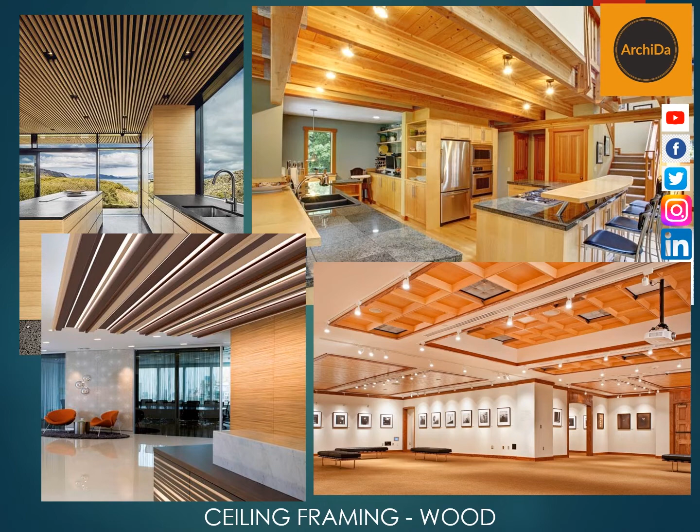For this video, we will be discussing the ceiling framing detail, or the basics of how to do ceiling framing using wood. So as you can see, you can always come up with different variations or iterations of how a ceiling should look, and not just a plain flat ceiling. So let's move on to learn the basics.

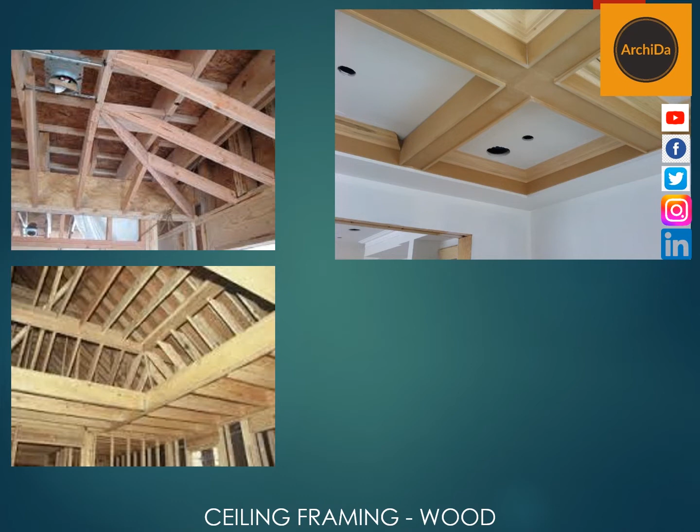For a ceiling that has framing that looks like this or like this, it's called a recessed ceiling. So this is how it may look, including your false beams. This is another variation. This is a 3-layer ceiling. And this is the arc ceiling, if you would like to call it that way.

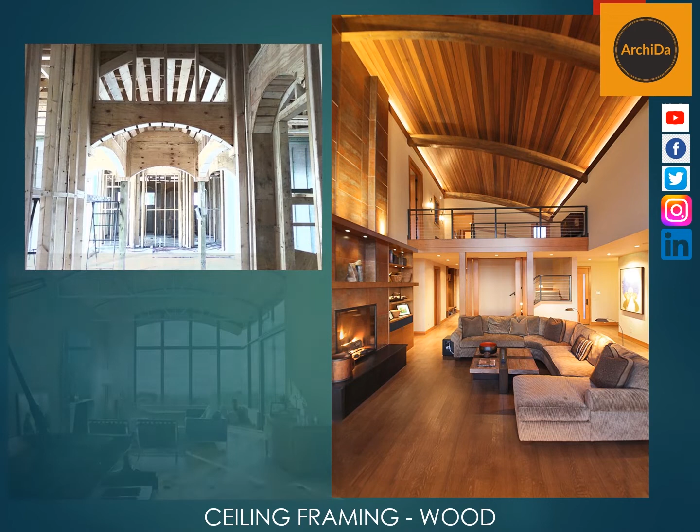Now for a semicircular ceiling that looks like that, it may come out like this, meaning to say, with this finish, you will just install slatted wood beside each other. This is also another variation of it.

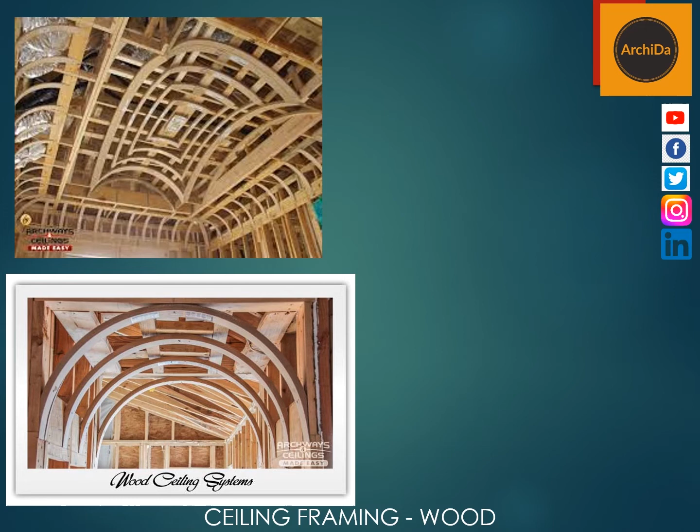Now in the event you would like to come up with a semicircular finish, remember the wood cannot bend into that radius, so you will have to break it down into several pieces to come up with that radius, after which you will install the actual finish. Or you can have it straight up like a straight dome-like structure.

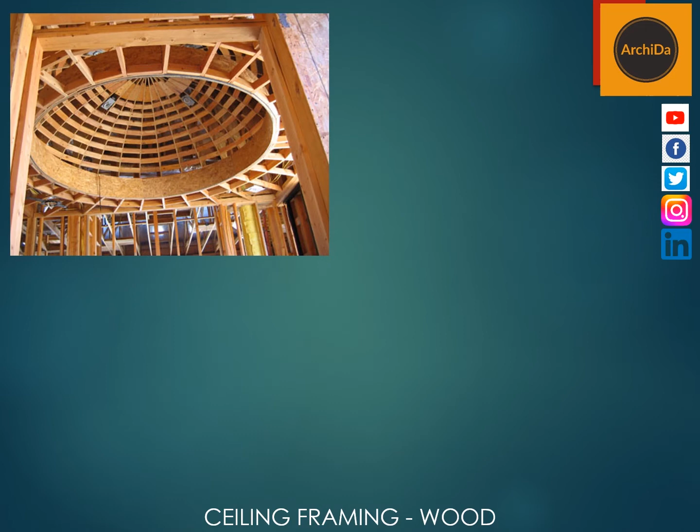Now in the event you would really like a full dome structure, that is also possible. As I said on my previous slide, you just have to subdivide it into certain sizes or segments wherein you can still bend the wood itself. So you can come up with a look like this.

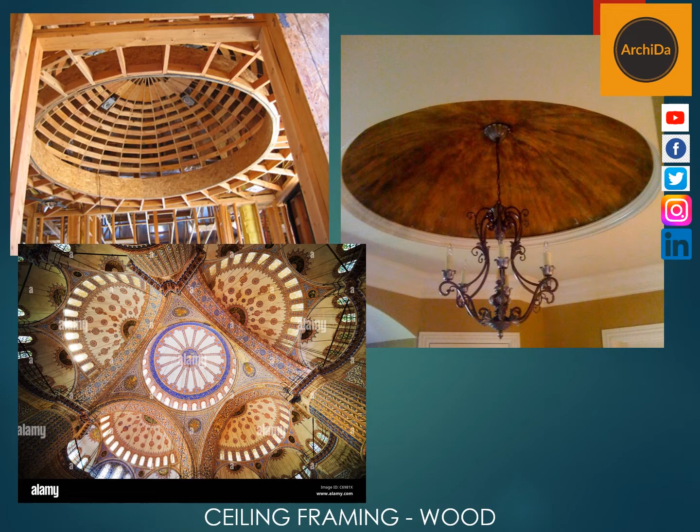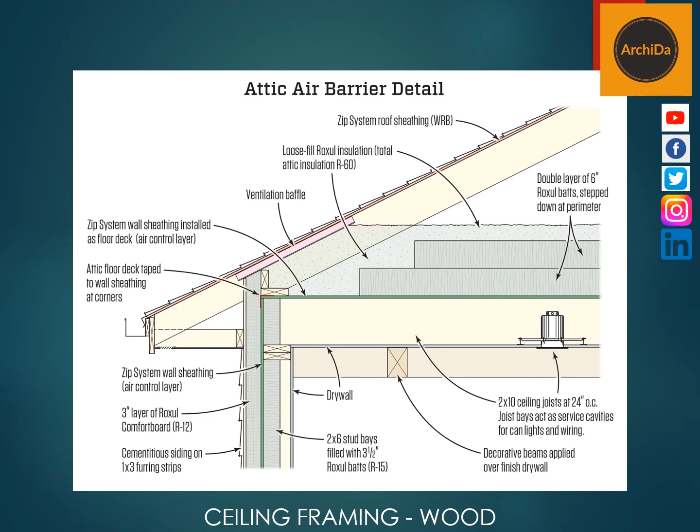Now if you were to study this ceiling detail, always try to remember to leave space above the ceiling finish for any type of lighting that you would like to install. For this detail alone, you may also want to add insulation and all those other things.

Now for the ceiling framing, it is just the same as the wall framing, wherein you will have to come up with a grid pattern and just lay it down. Then you will have to install your supports from that grid pattern up to the joist above, whether it's going to be a slab or a wooden joist.

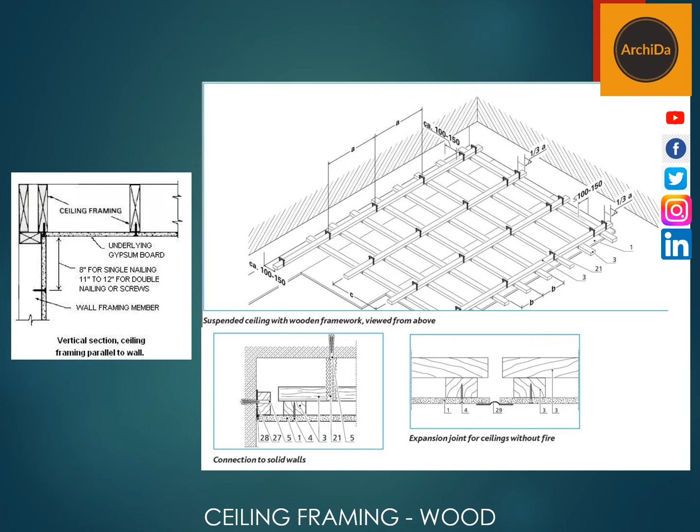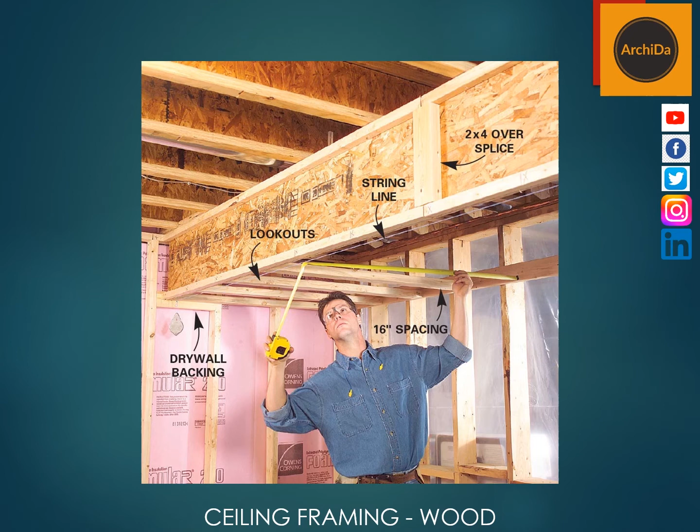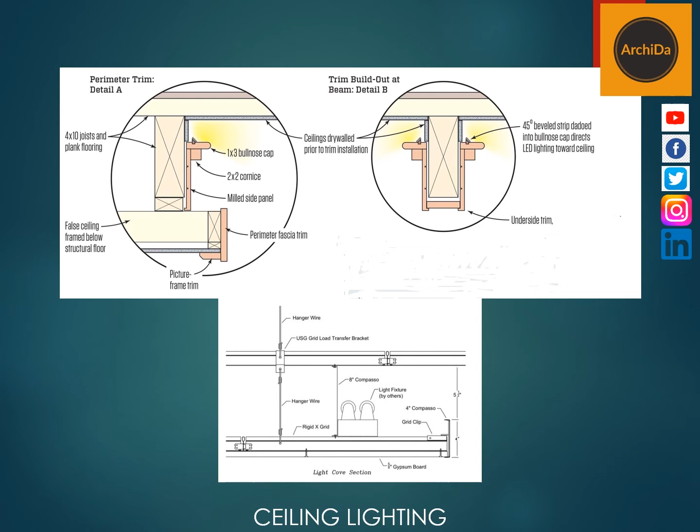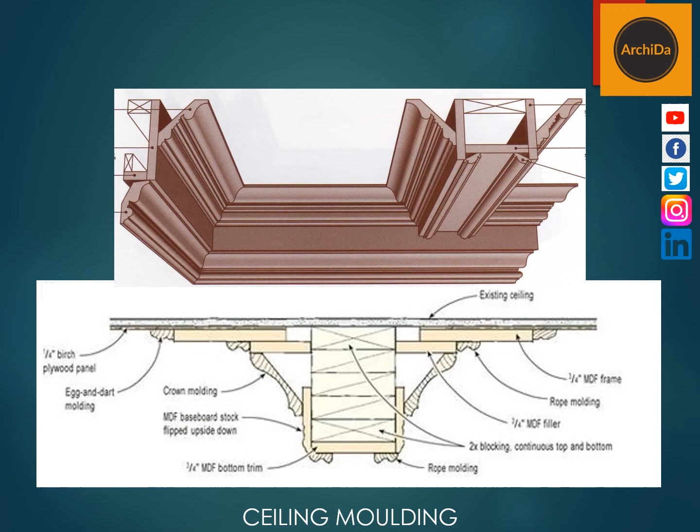So again, showing you these several pictures of simple to medium to even complicated types of ceilings, you can now install them based on what you have learned from this video. I hope you have learned something new, and see me in my next video, wherein I will be talking about ceiling framing using steel.